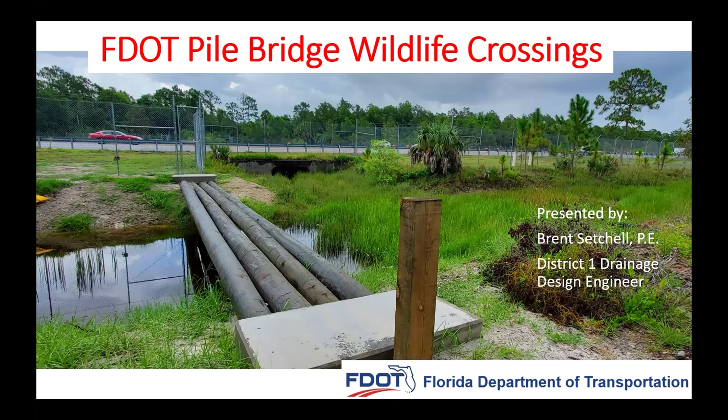Awesome, thank you for that. Jason set the stage for Florida and this need for connectivity. While we'd always like to do these giant wildlife crossings, unfortunately we don't have the funds, budget, or resources for that. So I'm going to share with you one of the innovative products that we came up with, to put a little bit of resources behind it, and it turned out to be such a great project. We call them pile bridges.

To set the stage, if anybody's driven along Alligator Alley, which runs east-west along the bottom of Florida, it's 50 miles long within Collier County, and extends all the way to the East Coast. There are 36 existing wildlife crossings along that corridor. They were built—I don't know if you heard the keynote or one of the introductory speakers this morning, Chris—he mentioned that one of the first ICOETs was regarding these wildlife crossings on I-75 Alligator Alley.

The western 9 miles did not have any wildlife fencing though, and so there had been 16 panther vehicle collisions. For those of you who don't know, the Florida panther is an endangered species. And there had been 30 black bear vehicle collisions along this 9-mile stretch of road.

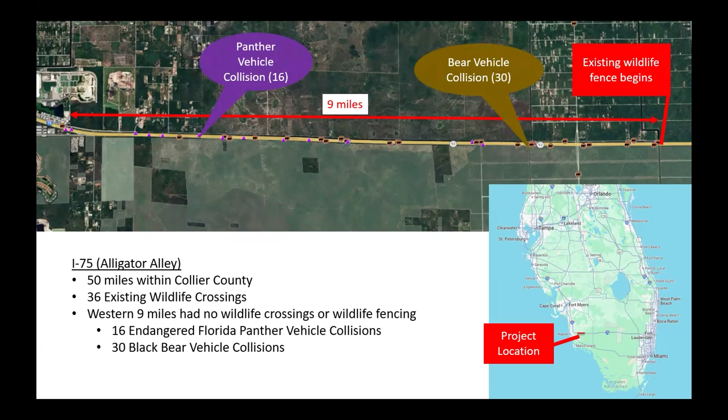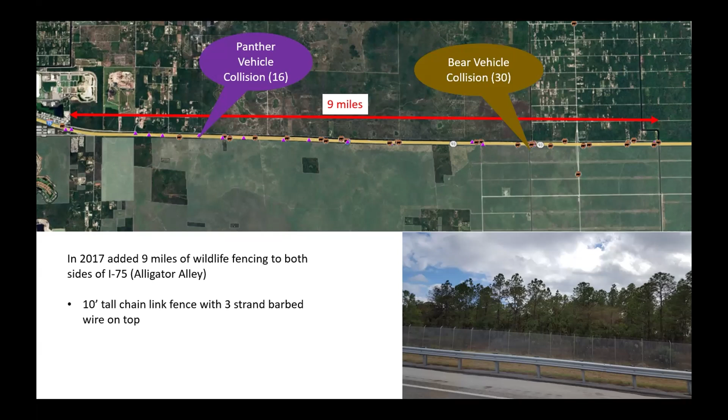Back in 2017, we got a request to add the 9 miles of wildlife fencing. So that's 18 miles—you have to do both sides of the road. A significant undertaking. We decided on a 10-foot tall chain link fence with 3-strand barbed wire on top, matching the fencing that extended east for the other 30-plus miles that were out there.

Along with that, there were 2 existing bridges on the eastern end at the Miller Canal and the Faka-Union Canal. We were able to retrofit those bridges to add what we call shelves or benches. I know most of you are probably familiar with those, but we basically created these benches there. They existed with rubble riprap embankments to protect the bridge from erosion, but that wasn't very conducive to wildlife movement, especially for hoofed animals.

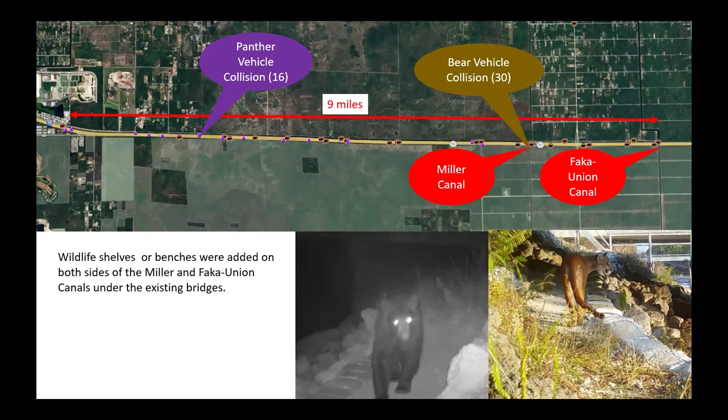So deer can't really move through there. The panthers are pretty agile, they could do it, and bears and so forth might struggle a little bit, but they would eventually make it across. But we wanted to make it easier for them, to encourage them to use these existing crossings that were there, and take advantage of the existing infrastructure.

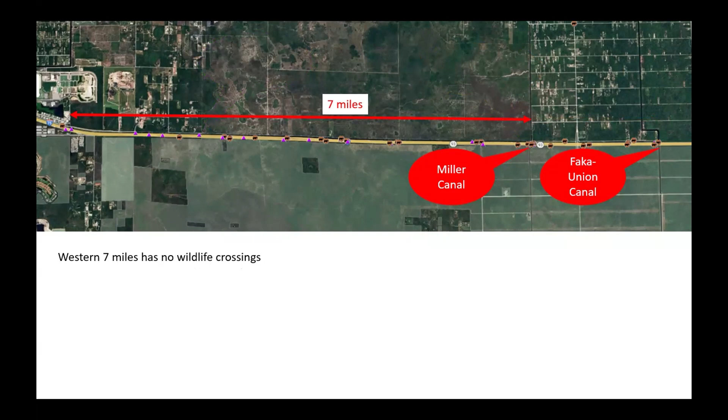However, that left us with this western 7 miles. Basically, from the Naples toll booth over to that Miller Canal, there were no bridges. However, we did have 5 existing cross drains or box culverts there. So we partnered with the fStop Foundation to monitor those existing culverts to see if anything was utilizing them.

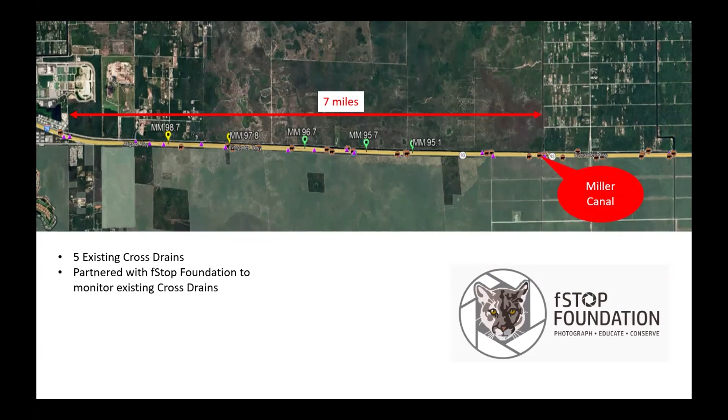To give you a little zoom in of what it looks like out there, you have the eastbound and westbound lanes there in yellow. Then there's one of the existing crossings, an 8-foot wide by 4-foot tall box culvert. If anybody's driven along Alligator Alley, they have canals on both sides of the road. The southern canal was one of the original canals built—they used that for dredge material for fill dirt on the original State Road 84.

Then when it became I-75, they had the wider canal on the north side, and dredged more material. So there are basically these canals that parallel I-75 along both sides the whole way through the corridor. Any wildlife that wanted to get to these existing cross drains has to cross both of those canals to get there.

So we went ahead and monitored these with the fStop Foundation. Let me see if this will play. So this is kind of it in June.

And then as it dries out, this is in March, our dry season, we've got an otter in there. He's snacking on a fish he caught, just chilling in there using it.

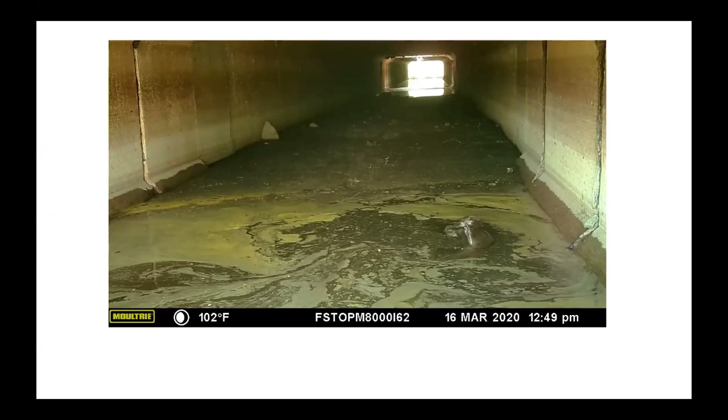You can see the stain lines on the side of the culvert there, so you can see how high the water typically gets up to, but then it recedes out in the dry season.

So then we knew we had it. It was like, all right, they're utilizing these crossings. So what can we do to help incentivize them, to help them want to use these crossings even more?

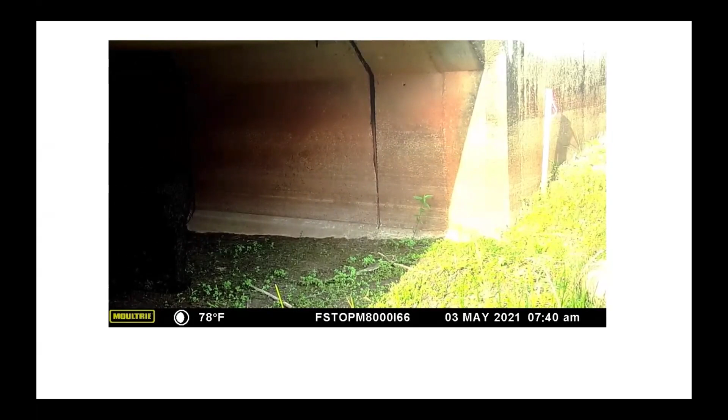But what can we do to again help incentivize this a little bit more? So we have these two canals right adjacent to where the culvert's at. We wanted to add these pile bridges.

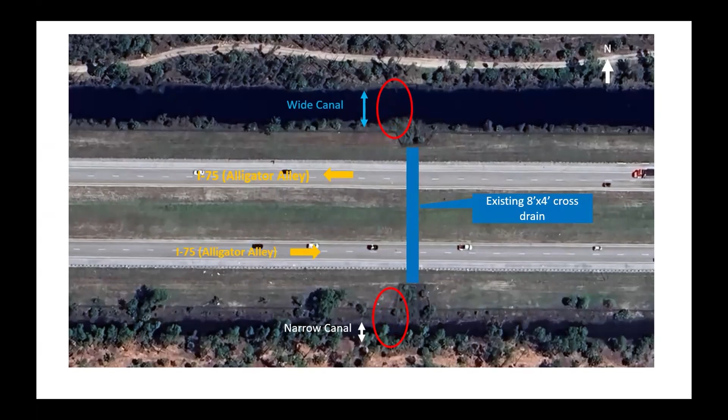And we were inspired by, actually, a YouTube video out of Pennsylvania. Does anybody know Bob's Pennsylvania wildlife cameras? Yep, so here we go.

So we saw that and we're like, hey, wait a minute, we just do a log across the creek or canal in this case, and wildlife should be able to utilize it, right? So we came up with these two different ones.

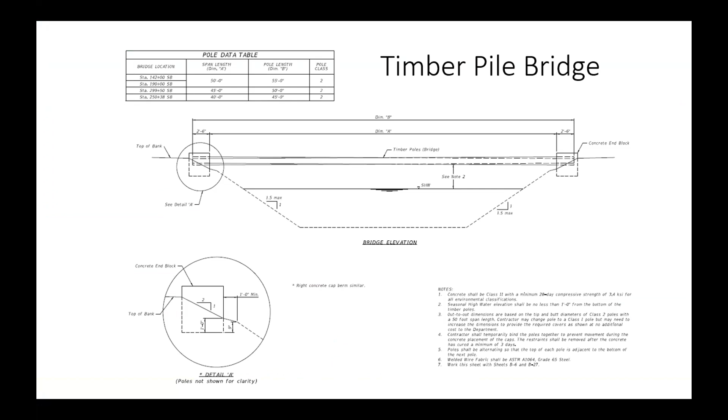So the first one was a timber pile bridge. That southerly canal was a lot narrower, so we could use basically just telephone poles. We laid them across the canal and embedded them in concrete in either end so that they wouldn't roll around. Basically took 4 of them there.

You can see a telephone pole isn't uniform all the way across, it kind of tapers as it goes down. So we matched up a fat end and a skinny end there, and again embedded those in concrete in either end there, and that's what it looks like.

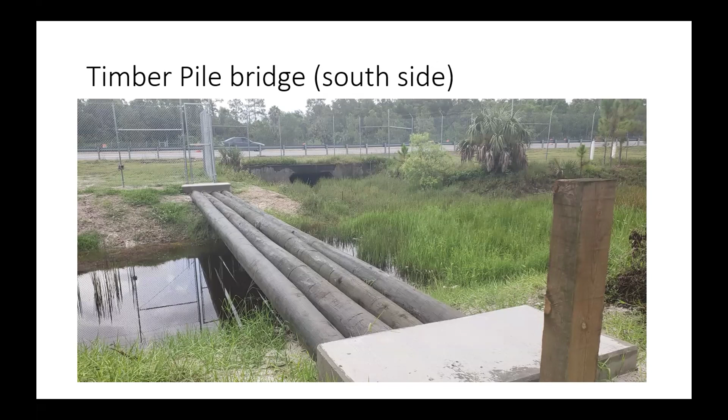You can see the culvert, how it lines up with the culvert there on the far side. So wildlife can walk across there and get into the culvert that way.

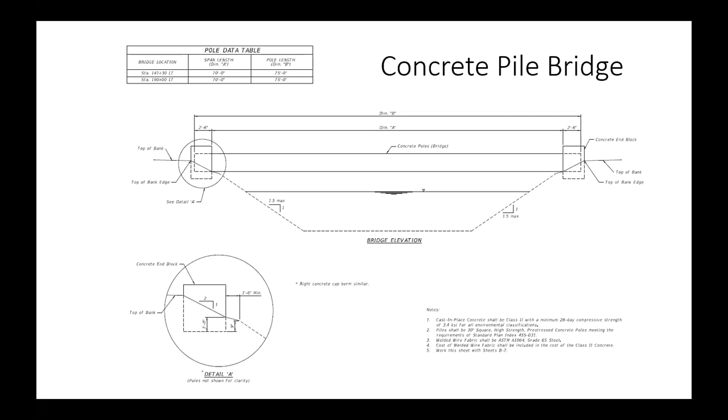And similarly on the north side, because the span length was much longer, we couldn't use the timber piles. So we ended up having to use basically a concrete bridge pile that you normally drive vertically in the ground. Again, laid it horizontally across the canal, and embedded it in concrete in either end, kind of the same thing.

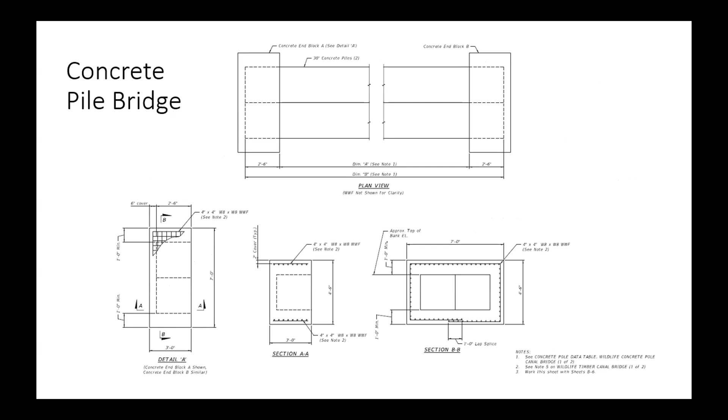We chose two 30-inch square concrete piles, which are typical bridge piles. You can get them in 24s, 30s, but we wanted something 5 foot wide or so for wildlife to utilize. And again, this is what they look like.

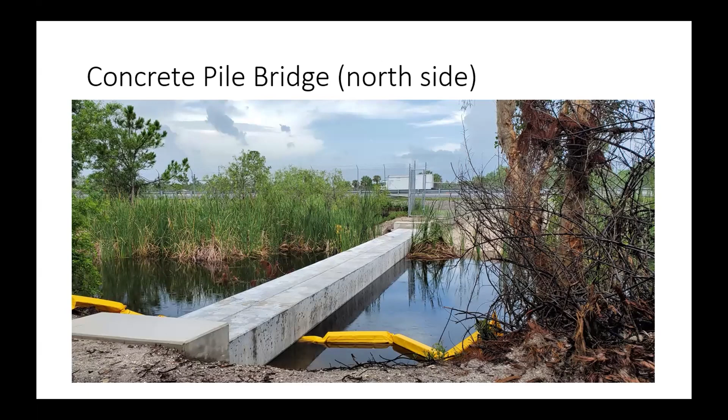It's kind of hard to see, but in the bushes there, back there is the culvert, its opening. So they line up with these existing cross drains. And there's 5 locations there.

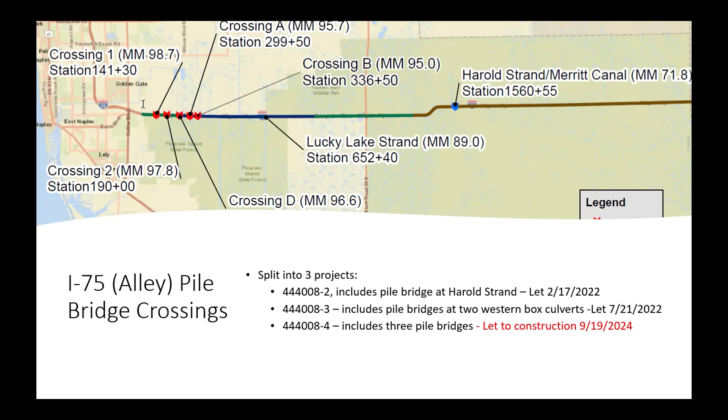And we did another one of the timber piles out there, it was an existing bridge that didn't have any connection across the canal there.

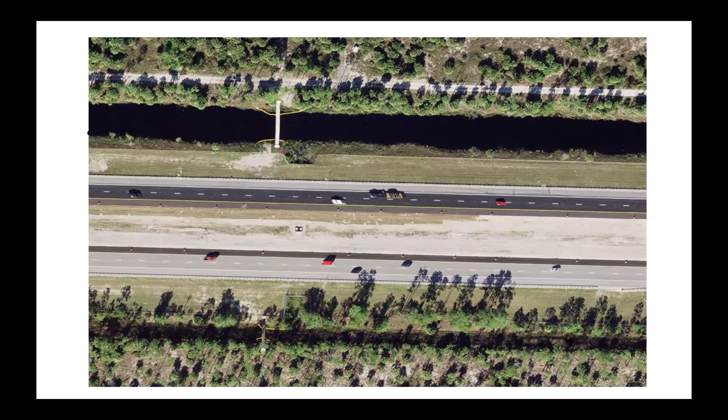So this is what they look like on the aerial view from, this is from Google, that has, you can see on the top side there, the concrete pile, and it's kind of hard to see on the bottom side there, the timber pile there.

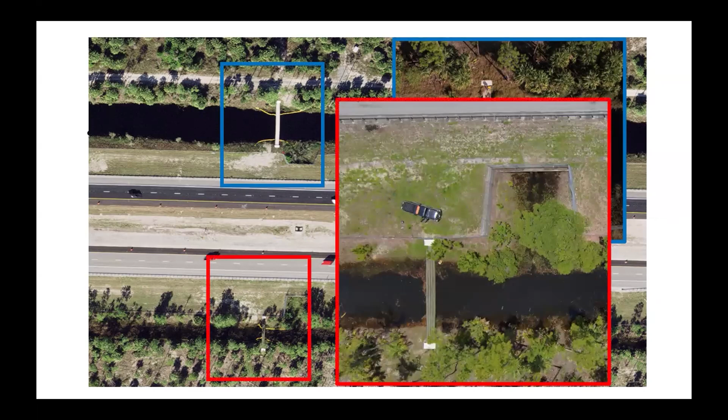But here's actually from a drone shot of what it looks like there. So you can see the concrete pile, and then there's the timber piles there lined up with the crossing there.

So, and then most importantly, did it get utilized? So let's take a look.

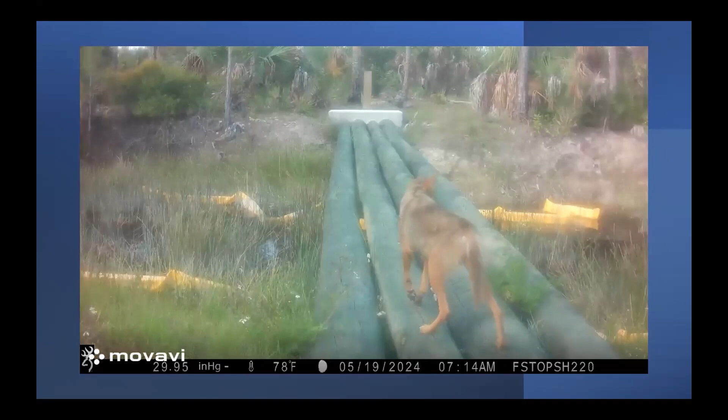So anyway, the ones on the north side, the concrete ones, we've made some retrofits and some future projects to help. We think it's the texture of the concrete — they're a little bit nervous of that. So we're going to make some improvements on some future ones as we go forward. With that, I'll take any quick questions, and then we'll move along to the next.

So that was like over 40 years since they've been collecting the data. Yeah, it's been over a long time period.

So the other ones we're going to do, we're actually going to put like a little curbing on the sides, and then put sand on there, so they're actually walking on a natural sand substrate.